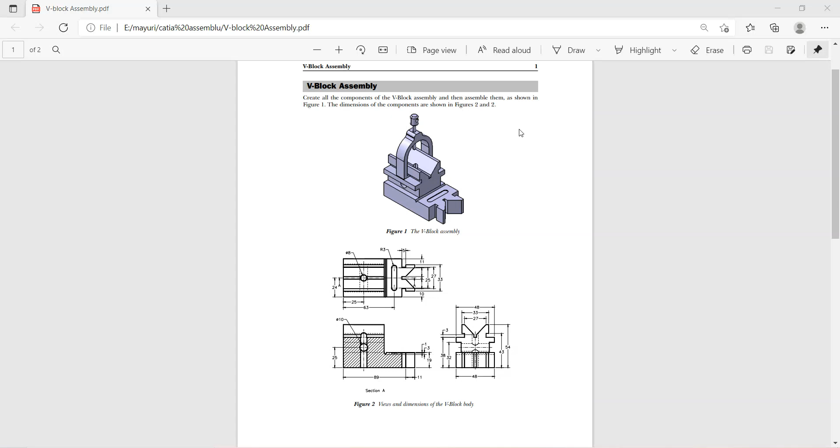This is the V block assembly. Today we are going to see how to make this U clamp.

First open CATIA, then go on Start, then Mechanical Design, and then Part Design. After that, write 'U clamp' here and click OK.

We are going to make it as given in the figure with the same dimensions. I am going to just make this half part so I can mirror it and extend it.

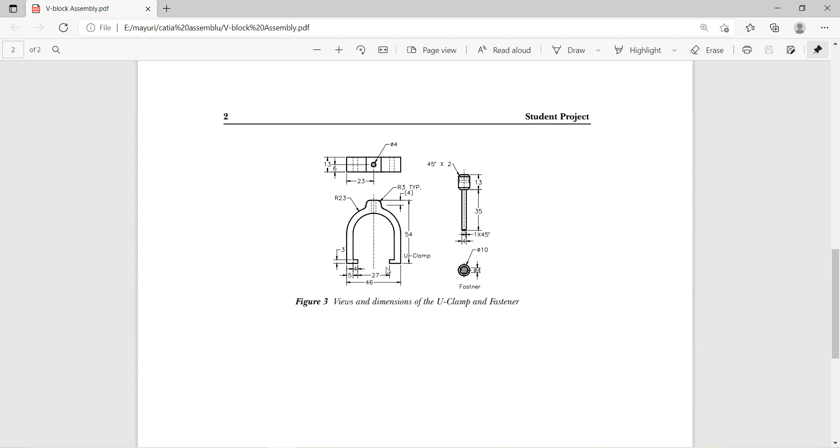First open CATIA, select any plane you want, and then go on the sketch option from here. Now you have to use this profile command.

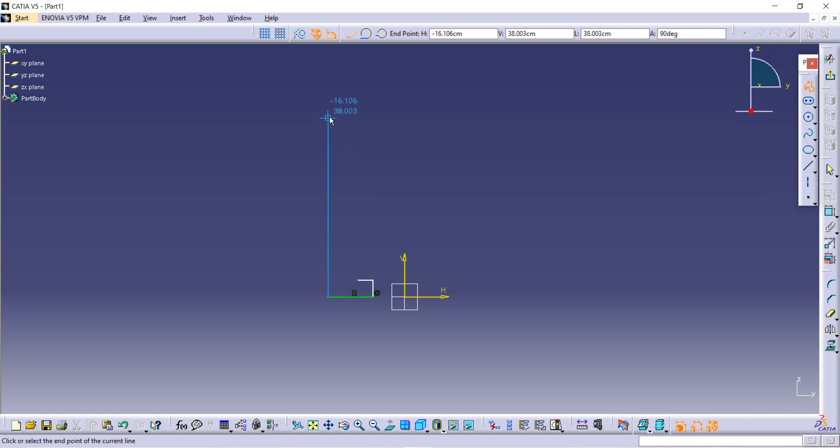First make one sketch, the half side sketch, and you have to use this tangent arc.

After that, make one straight line and join it till the center. Similarly, I am taking this profile command, and this is the extended part, and again tangent arc from here till the center axis.

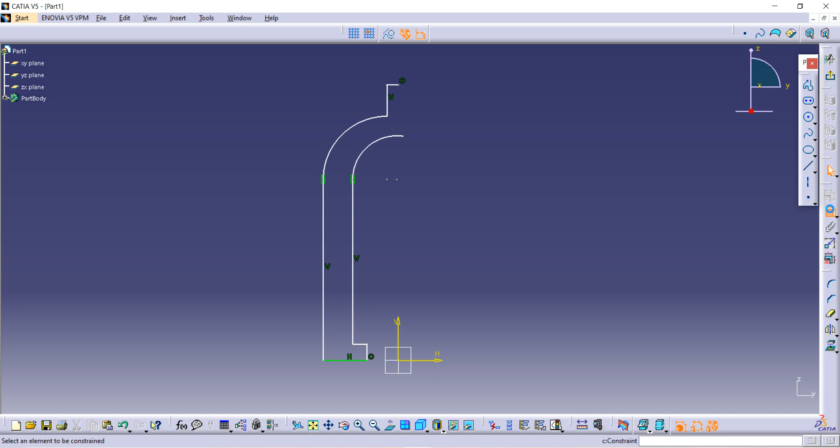Now we have to give dimensions, so use this constraint option. The distance between this external point to the central axis is given as 46 divided by 2. I'm using divided by 2 because I am just sketching half.

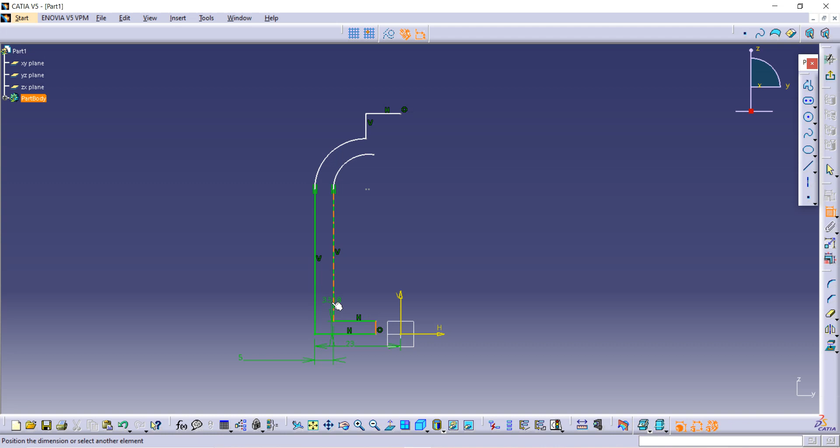Now the distance between this line to this line is given as 5. The distance between this line to this line is given as 4. And similarly, the distance between this to this white line is given as 3.

Now the radius of this circle is given as 23. Again, the distance between this external point to this surface is given as 50. It is given as 54.

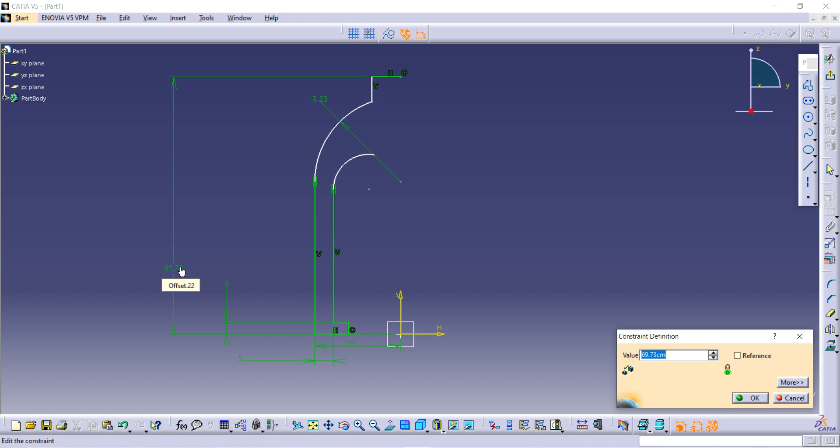Now let's make it. This point and the central axis must both coincide, so make them coincide here.

Again, the length of this is given as 5, and one thing remains: we have to select the central point of this external circle and this line. They should both coincide, and they are already coincided, so just remove it.

Again give this constraint, take this constraint option. This length is given as 4, and this is how we have completed that. Select this external circle and the internal circle, then go on the coincidence box and select concentricity from there, and click OK.

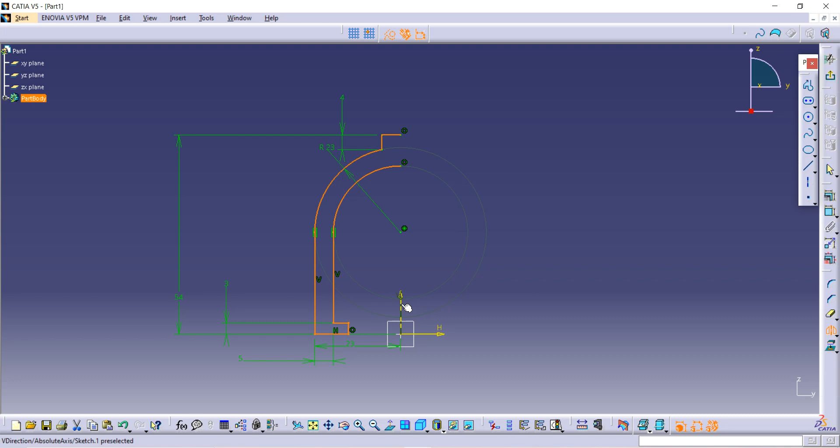Now we have completed our sketch, so select the whole sketch, then select the mirror command and select the central axis. This is how we have completed our sketch.

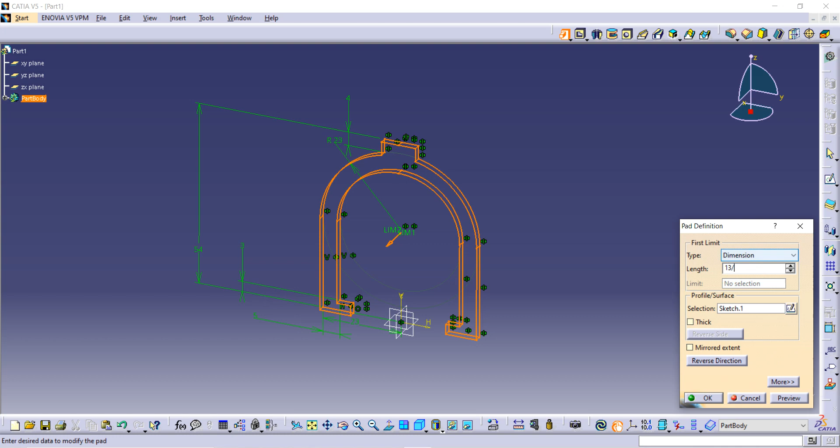After that, go to exit workbench and use the pad command from here. The pad is given a length of 13, so write 13 divided by 2, and select mirrored extent so we get the central plane at the center and mirror to both sides, giving us pad on both sides. Click OK.

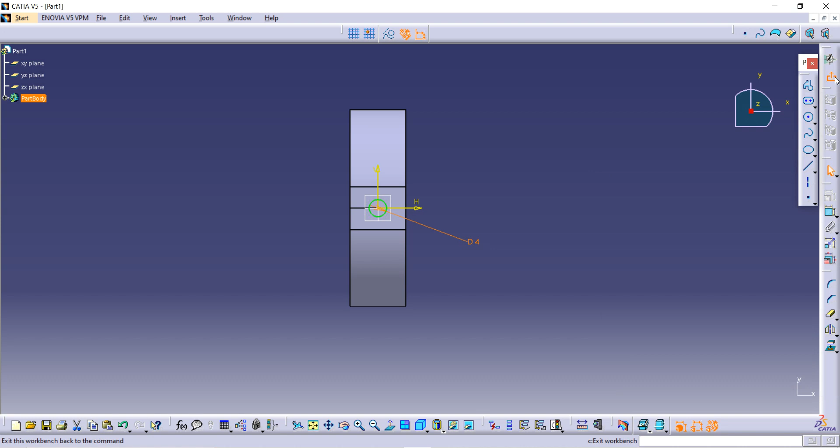Now we have to sketch on this surface, so select the surface and go on the sketch option, select circle and make one circle, give dimensions to it - its diameter is 4 - then go to exit workbench. Now make this pocket command, and the pocket should be up to last, then click OK.

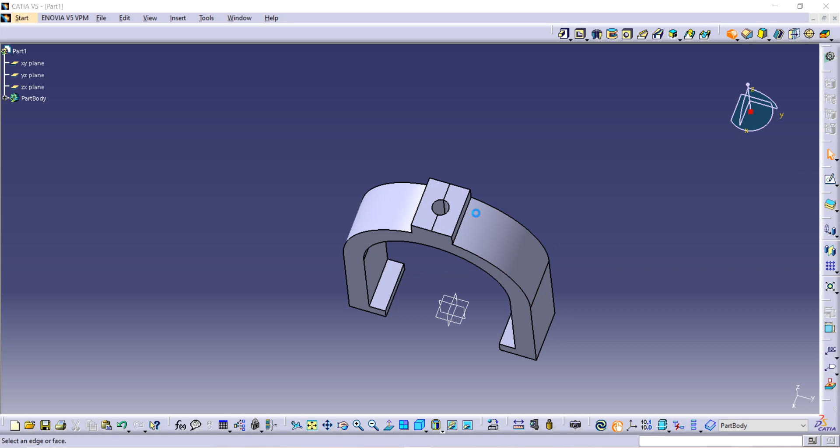Now we have to give a fillet radius here, so we use edge fillet. Select edge fillet and click on this, and these four sides, with the given radius of length 3. Take a preview and then click OK.

This is how we have completed our sketch.